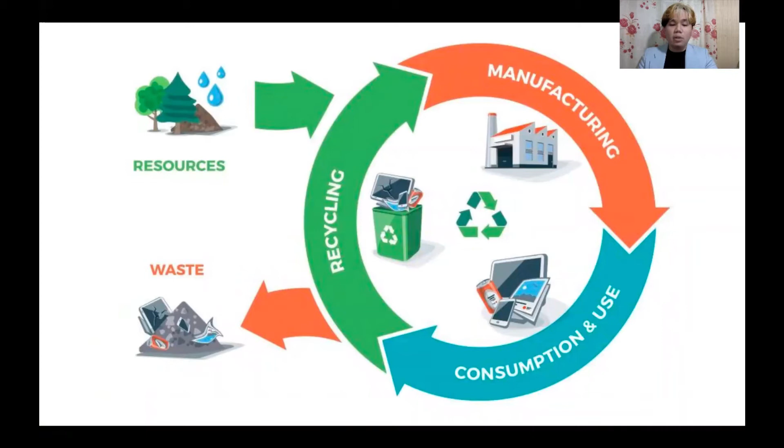In nature, the waste of one organism is food for another. Industrial ecology fits in with the aims of waste infrastructures to be holistically sustainable and circular in every aspect and process. This is because industrial systems are open loops, and the same can be said for the current trends in our solid waste management practices and infrastructures.

Eco-waste symbiosis can be achieved through the realization of industrial ecology core values. These are industrial metabolism, dematerialization, life cycle assessment, ecological design, which incorporates sustainable features and processes to maximize recyclability, and the eco-industrial park, which is the physical manifestation of industrial ecology. It provides green jobs for low-income residents, practices ecological design in physical architecture and its processes, and promotes waste and material reuse along with energy conservation.

Industrial ecology is a multidisciplinary approach that is both industrial and environmental. It is a means to achieve a sustainable cycle, minimizing energy and material consumption and waste production. In architecture, industrial ecology can be found in material sustainability, zero waste pattern, biomimetic architecture, and other ideologies that gravitate towards an eco-centric point of view. It can be applied through the responsible and conscious use of materials, application of ecological processes in building systems as metaphors and analogies, and planning spaces with the utmost consideration for minimum environmental impact.

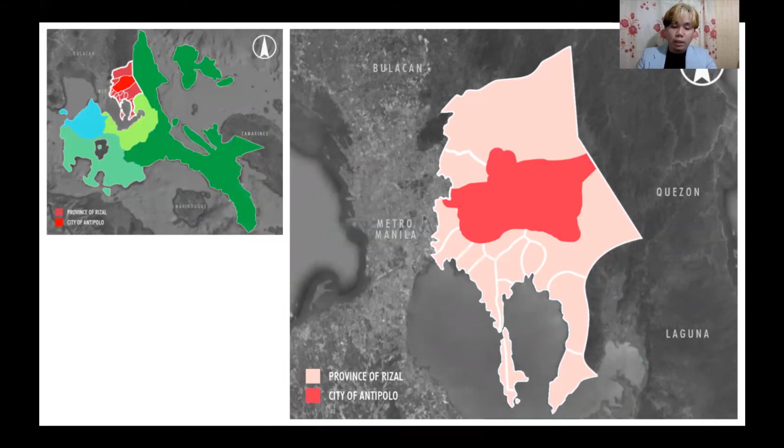Among the 14 city and municipalities of Rizal, three geopolitical units were chosen to serve as the site for the complex: the city of Antipolo, the municipalities of Rodriguez, and Taytay. They were the prevailing gross sites that were evaluated to have the most suitable sites for the development.

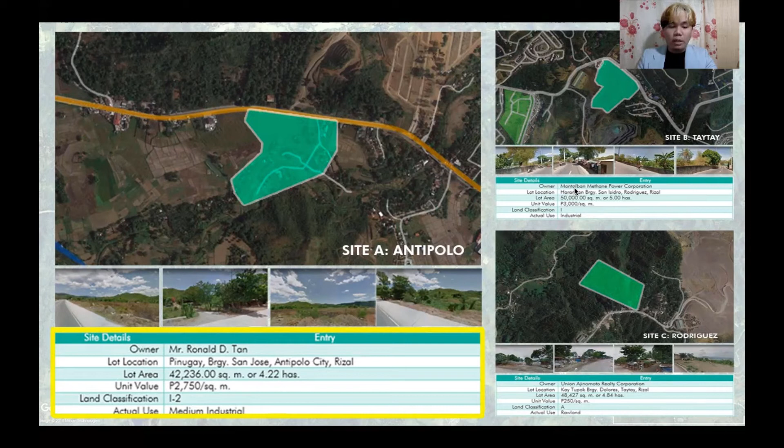Based on the analysis conducted by the author, through the gross, discrete, and Likert scale system, the most suitable site for the proposed Provincial Alternative Resource Complex is the site situated in Pinugay, Barangay San Jose, Antipolo City. The selected site is a privately owned industrial land compatible with the developmental context and constraints of the proposed project.

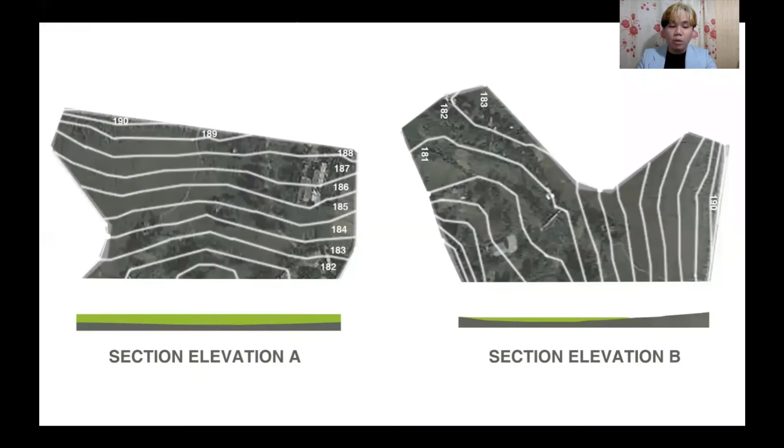Among the three site candidates, the site in Antipolo City is the most proximate to the province's major solid waste generators, as well as to the supporting facilities that might prove to be beneficial in aiding the viability of the proposed structure. The Pinugay site also possesses the most ideal environment for the project, a general topography that is relatively flat and free from geotectonic and climate hazards.

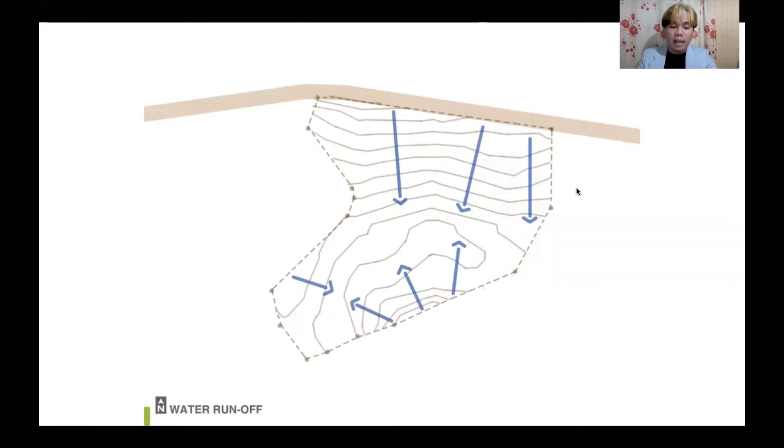Aside from this, the site is naturally free from noise-generating establishments, which can help create a structure and an environment conducive of learning and executing technical process without the inconvenience of noise pollution.

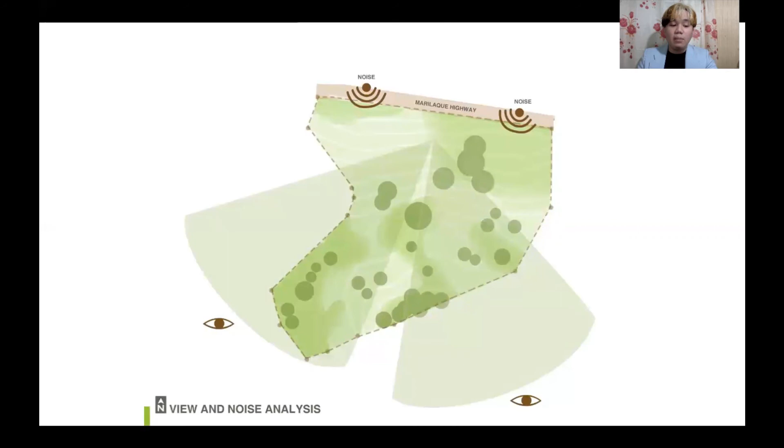Finally, the site being located in the city of Antipolo provides an ease of access for the stakeholders coming from all over Rizal, as the city of Antipolo is geographically positioned adjacent to almost all of Rizal's municipalities.

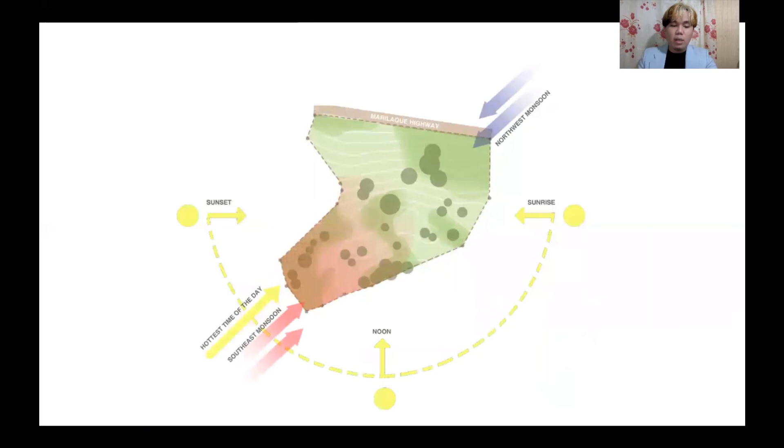The site is situated at the geographical heart of Barangay San Jose, Antipolo, the barangay known for its vast land, is home to Antipolo's industrial and like establishments and infrastructures.

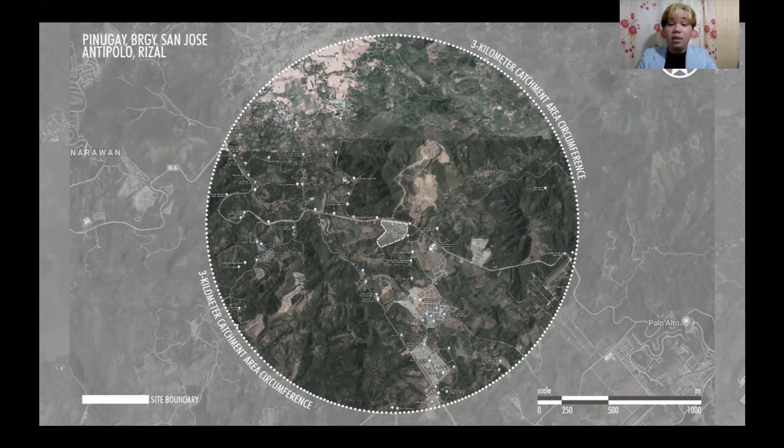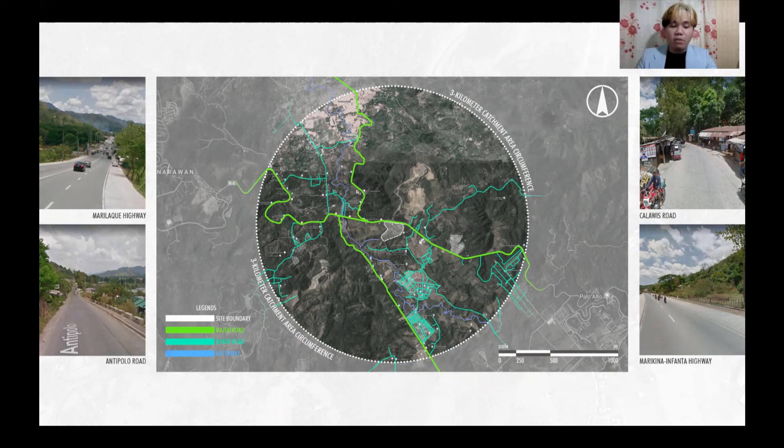There are several considerations that need to be taken into account to further support the feasibility of the project, that is the identification of its paths, edges, districts, landmarks, and nodes through a 3-kilometer catchment radius.

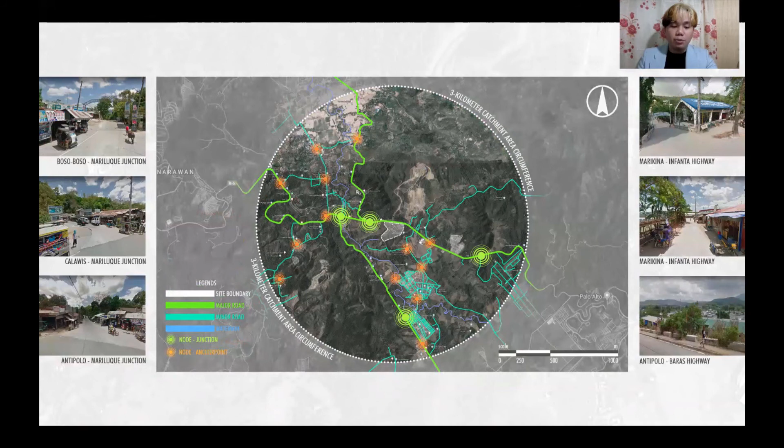Aside from this, architectural strategies, planning concepts, and programs from existing facilities, both foreign and local, were taken into consideration in the conceptualization phase. These aspects are integrated as spatial, function, and form translations, as well as building systems.

The Rizal Park aims to integrate low-cost and renewable materials which can be retrieved from solid waste resources. This materiality will substantiate the development's goal to utilize the abundant waste resource.

The complex yearns to harness the natural lighting and ventilation to minimize energy cost, promoting comfort and cost efficiency. Several others also promote self-sufficiency and resource renewal to support the functions of the complex given its rural location.

The following slides provide the form morphology of the site as well as the planning development.

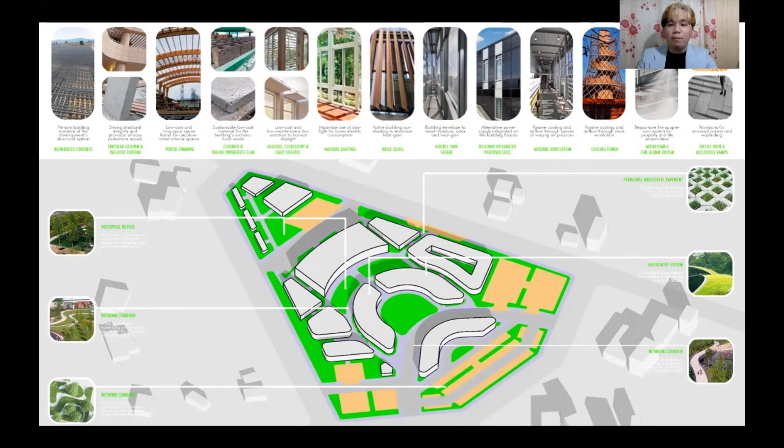Here lies the site context, permitted with the site setback. The function proximity and the hierarchy were based from the solid waste management hierarchy.

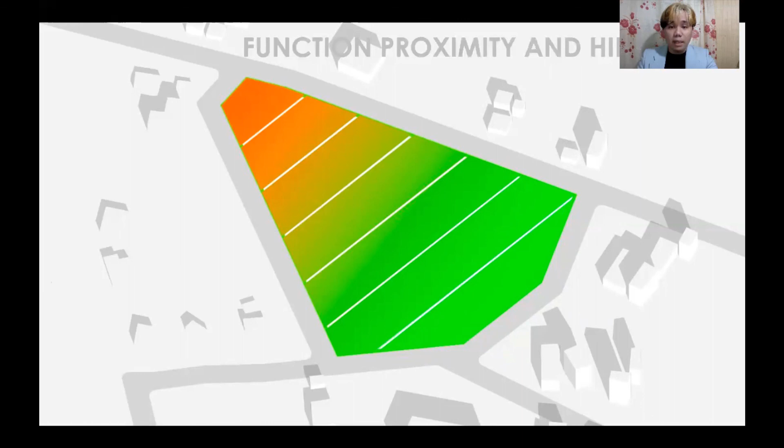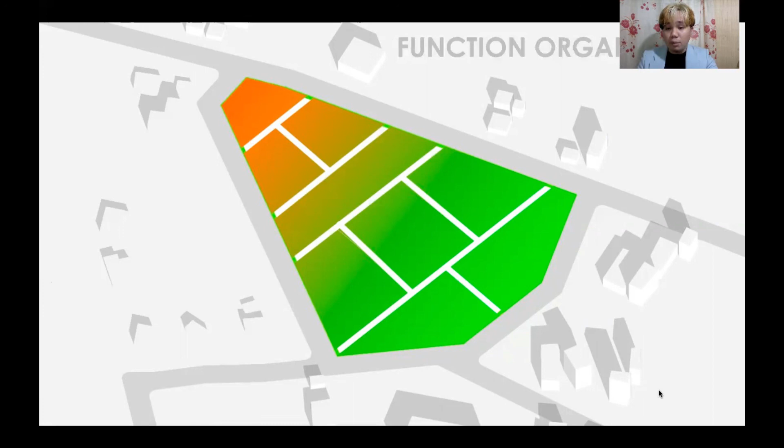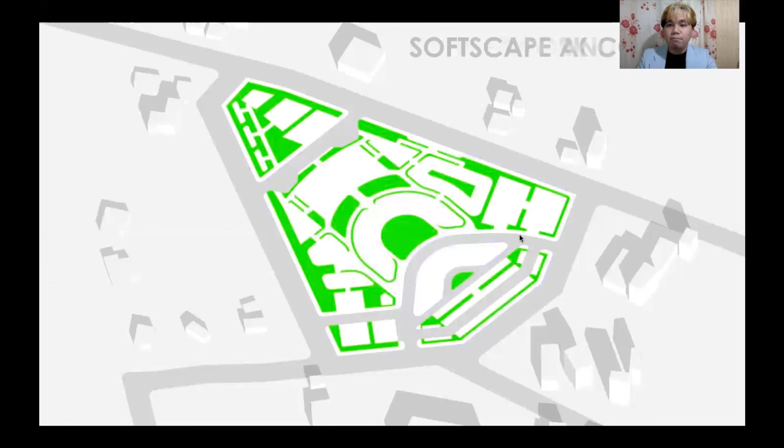This is the redefined site access, the network corridor in which the users can travel in and out of the site, the integrated softscape and foliage, the parking and services for the trucks and the users, and the building form, which constitutes the conceptual site developmental plan.

This is my proposal, the Rizal Provincial Alternative Resource Complex.